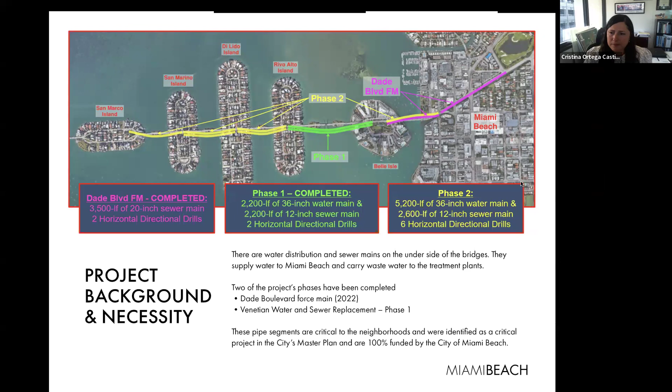Thank you. Next slide, Gabby. All right, so as Christina said, this aerial piping is in very poor condition. We are replacing the water and sewer pipes between San Marco Island and Rivo Alto Island, and then the other water pipe between Belle Isle and Sunset Harbor on Dade Boulevard. It's a 36-inch water main HDPE pipe and a 12-inch sewer, very similar to the phase 1 project that some people in the area may be familiar with that we just completed.

The construction is planning on taking place in 4 phases, and it's essentially the drills between the islands as each one of the different segments that we're going to be completing this in. The total project timeline is going to be from July 31st, the end of this month, and it will be completed November 14th of 2025. So it's a very long, complicated project.

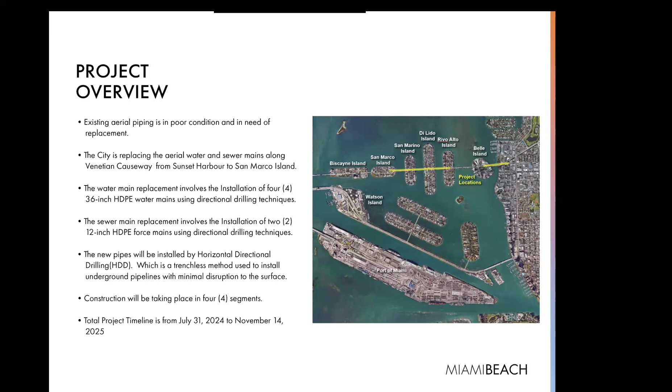Our first segment that we're going to complete is between Miami Beach, or Sunset Harbor, to Belle Isle. And right here on Dade Boulevard, you can see the red hatched area is where they're going to be placing the directional drill rig, and they're going to start the drill from there.

The eastbound traffic will be detoured north onto Purdy Avenue. It says Sunset Harbor Drive here; that's just the MOT company that created this. You're going to take your right turn heading east on 18th Street, and then you can turn south again back onto West Avenue and get back onto Dade Boulevard. And the westbound traffic will still be able to free flow through there as normal.

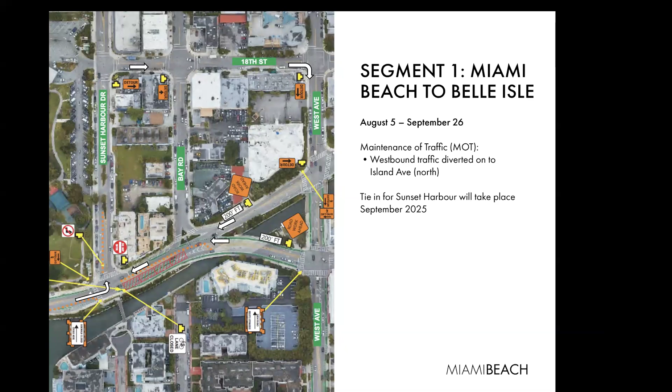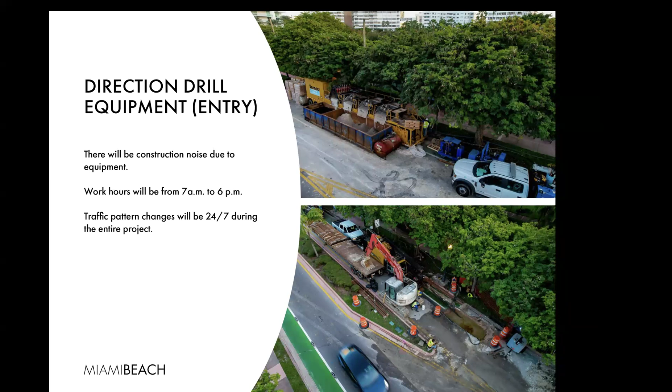I put this slide in here to show some of the equipment that you can expect to see in that area. This is some of the drill rig that they'll be using and some other heavy equipment that will be in that red hatched area that I talked about earlier. There is going to be some noise from the construction equipment. Their work hours will be from 7 a.m. to 6 p.m. And this is going to be a 24/7 closure, even though they're only working 7 a.m. to 6 p.m. This equipment is very heavy, very difficult to move, and you have a lot of open pits that make it difficult to close up after we've finished our work for the day.

Like I said, it's going to be the first segment, and it starts August 5th and goes till September 26th. So it's approximately 2 months long, and they will have to return on Belle Isle to do the tie-in, which they'll do later, and it's tentatively scheduled for September 2025, although that could change. It's very far away, and if we move faster, that time will change.

Some of the equipment and materials that you can expect to see in this area: these are the pipes that they'll be storing and fusing together, and they'll be stretched along that 1 block segment within that zone. When they're ready, the drill rig will pull this pipe back through the hole that was drilled, at which point the contractor will do some pressure testing and some surveying, and once they're finished, they will place temporary asphalt over that hole and close it up, and we'll move on to the next drill. And as I said, they'll come back and do the tie-in later in September 2025.

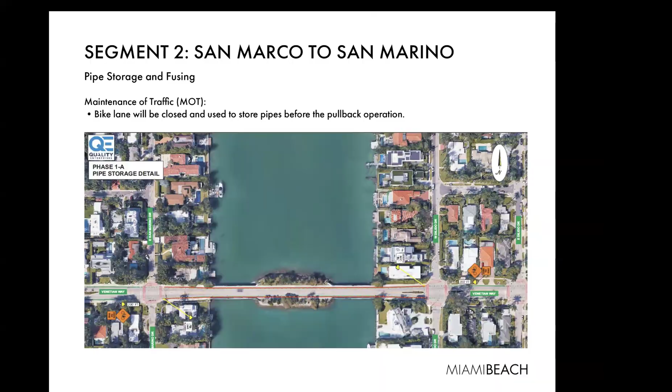Again, same picture from before, but this is what you'll expect to see, how the pipe is stored in the bike lane. And you may see some pipe materials and the fusing machine stored somewhere offsite around those areas.

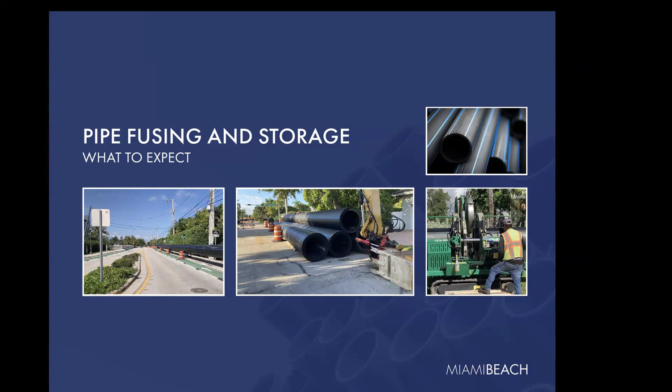The pullback operations typically only last a day or two. For the San Marco to San Marino segment, it's tentatively scheduled for October 25th. During this time, there will be a one lane block between Di Lido and San Marino Island. Flaggers will be directing traffic. It's only going to be one lane open. You'll have a flagger that'll stop traffic in one direction while the other direction flows freely, and then the flagger on the other side will stop traffic and allow the other direction to flow. Like I said, it's a 1 to 2 day operation, so it'll be a minor inconvenience, or a major inconvenience, for a few days.

And here's just an image of what you'd expect to see for a pullback. It's a very complicated operation. We have to keep everything clear, so it's the best way to maintain safety for the community during this time.

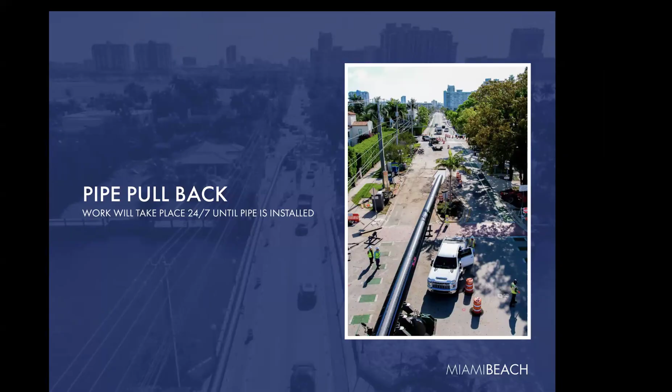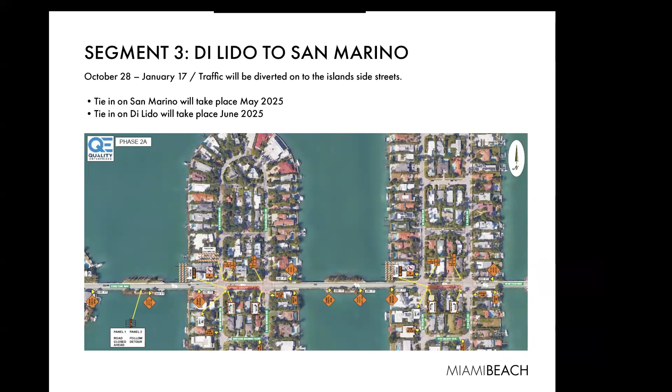On this pull, on segment 3, the storage is going to be between Di Lido and San Marino. Again, the bike lane is going to be closed. You'll see some of that fusing equipment and the pipe stored in the bike lane, as I mentioned before.

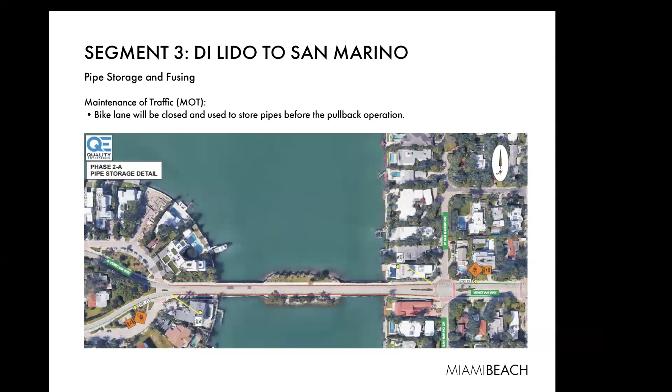And during the pullback, again, a 1 to 2 day operation. This drill does have two. It has a water main and a sewer force main that has to be pulled through. So there will be 2 pullbacks. One is December 10th, and the other one is scheduled for January 9th. Again, it's 1 to 2 days for each one of those dates. So during that time, again, that one lane will be blocked. Flaggers will be on either side, stopping and directing traffic.

And then this is segment 4, very similar to the previous segments that we talked about. This one is going to take place January 10th, 2025 to March 3rd of 2025. Again, traffic's diverted on the side streets, and the tie-ins for Di Lido will take place in June of 2025 and in July of 2025 for Rivo Alto.

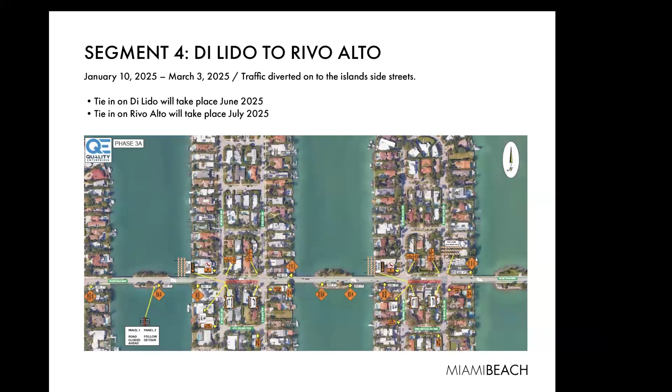The storage for this segment will be between Rivo Alto and the bascule bridge that leads to Belle Isle. It'll be on either side in the bike lanes between Rivo Alto and that bridge.

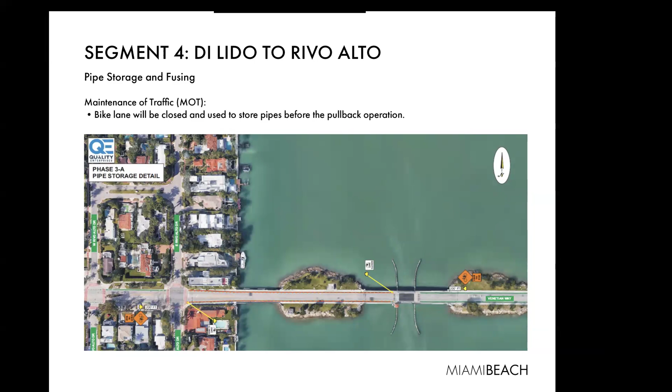And then again, this lane will be closed for the pullback. Again, there's another 2 drills here. It's expected to happen February 20th of 2025, and then again on March 18th of 2025, 1 to 2 days for each one of those dates. Again, lanes can be blocked. Flaggers will be stopping traffic and directing vehicles and pedestrians through.